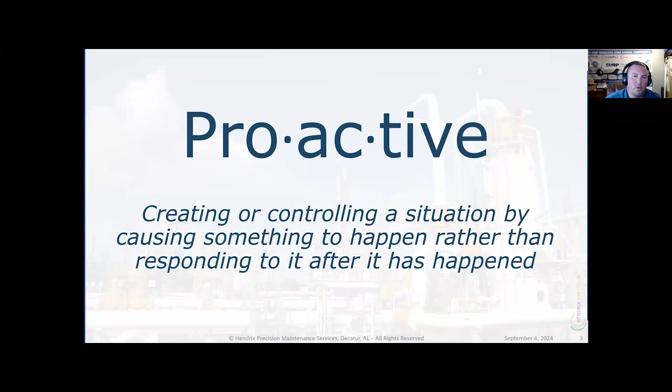So, proactive - what does it mean? One of the most common things I hear, and said myself early on, is when you go to a maintenance and reliability conference, a workshop, or a training, you hear a lot of people say that they want to become more proactive and less reactive. As you go around a room and people introduce themselves and talk about their responsibilities, you'll hear the first person say, 'I'm here because I want to be more proactive, less reactive. I want to do more preventive and predictive maintenance and less emergent maintenance.' Right after they say that, you'll see a lot of heads nodding and hear a lot of agreement throughout the audience. Typically the outcome that comes from that, and where people naturally want to go, is towards more preventive and predictive maintenance.

I want to talk about natural failure patterns and what the data suggests about failures throughout industry - this is industry as a whole, components and assets that have failed across all classes, and the common trends we see in equipment failures. Often what we assume is that the likelihood of an equipment failure increases with age - as something gets older, it gets more likely to fail. This is often at the core of why our maintenance technicians, teams, and reliability teams have their schedules filled with a lot of preventive maintenance work. A lot of times that's a good idea - the most important thing we do in industry is preventive maintenance, taking care of the equipment we have, if it's done right. Unfortunately, there's a lot of preventive maintenance work that is essentially busy work and adds no value.

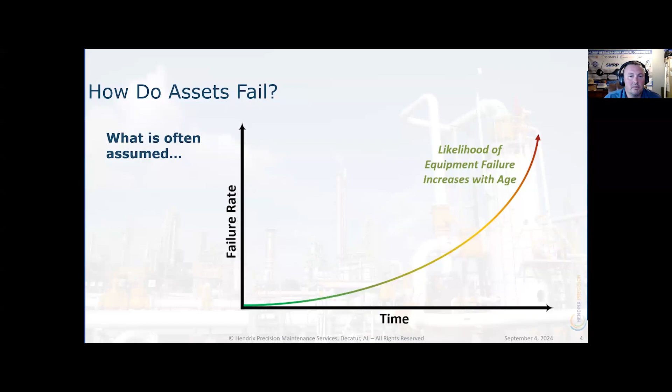Common studies have found anywhere from 30 to 75% in a lot of facilities of the preventive maintenance work that technicians have their day filled with isn't adding any value. That's what we want to get at here. Work that's often done for the sake of an asset, at best, and a lot of times for the sake of a metric, doing the work to satisfy the PM compliance metric so they can pass that up the chain, instead of doing preventive maintenance work, inspections, and work that takes care of the wear components of that asset for the overall success of the business, department, and production.

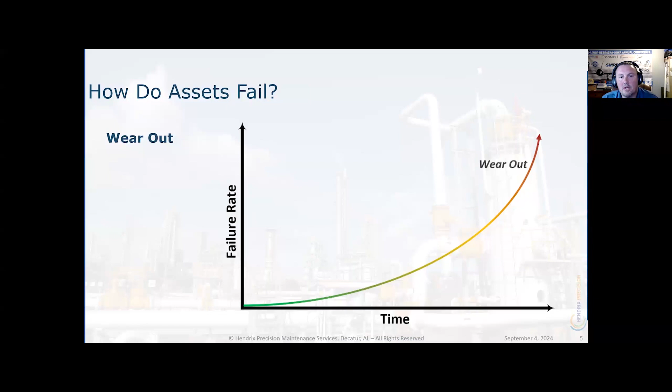This curve that we commonly think of as things wearing out over time is called the wear out failure pattern. Wear out is just as it explains: as things get older, as they have contact and wear components, they fail and degrade. Environmental factors, material selection, just the nature of the thing. Filters clog and can't be washed. Scraper blades wear out and need to be replaced, and things of that nature.

And then we also have random failures. A lot of times you'll hear people saying 'I don't know what happened,' or things like gremlins, 'that's never done that before.' These have no discernible pattern, no repeatable pattern, and nothing tying it to the overall age or number of cycles associated with that asset.

A lot of times when you have failures that are random in nature, the source is poor operational knowledge. Operational overload is very common here, where it's not a consistent overload, but a one-off where it's being run outside of the acceptable band of operation. You'll also see poor design factors contributing, items not being designed for the environment, and poor maintenance practices.

A lot of the random failures, if you have the data to dig in and see what the source of your failures are at your facility, a lot of times these failures will be as a result of, or shortly after, some sort of intrusive maintenance has been done. And what often isn't understood is that the next pattern we'll talk about is infant mortality.

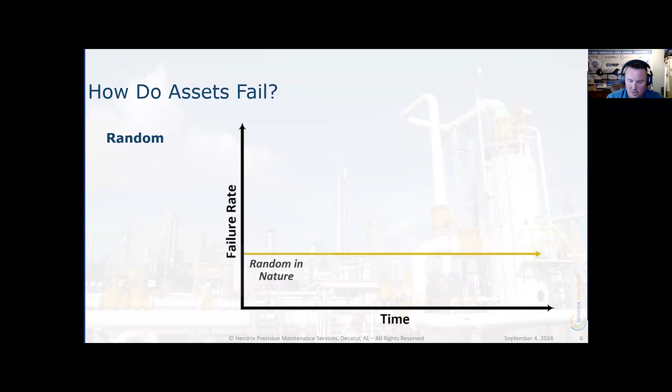When we do intrusive maintenance, tearing down a piece of equipment that's running properly with poor workmanship, we have what's called infant mortality. And anytime we do intrusive maintenance, we reset that clock, or we reset the band.

When we start up and something fails at the onset, a lot of times you'll hear things like bad out of the box with electrical components, with bearings, with mechanical seals. Start it up and it fails shortly after. A lot of the sources of failure with this are similar to the random failure, but it's tied to being fresh from startup or shortly thereafter.

Poor equipment design, poor system installation, manufacturing errors, quality issues do happen. Motors come in, bearings come in that are bad. Mechanical seals, with ISO standards, 9001 standards for quality, those aren't as common as they used to be, but there are a lot of counterfeit parts coming in and things of that nature. So you do need to be aware of this.

But more often than not, situations and failures associated with this curve or failure pattern come from a decision that somebody's made, either in the installation or the operation, incorrect operation, or bad workmanship, just not knowing. A lot of times technicians are doing the best they can with the tools and knowledge that they have.

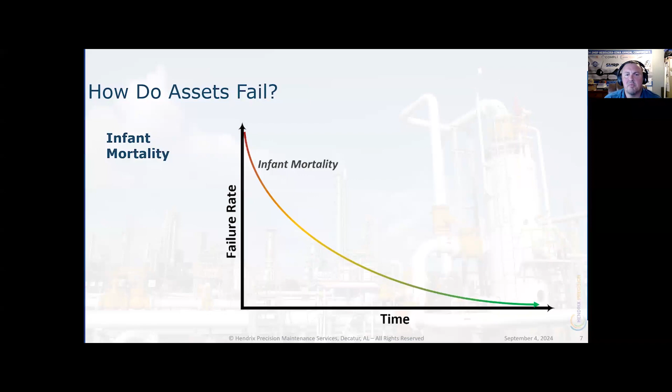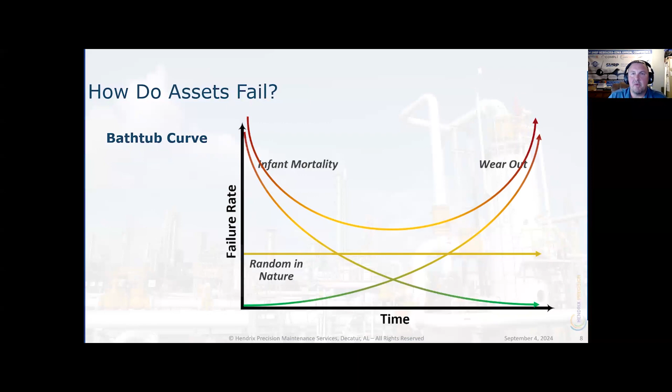So those three curves, three standard patterns: wear out, random, and infant mortality, combine to what's commonly known, and you may have heard it referred to, as the bathtub curve. But those three patterns are the prevailing patterns for how we see failures in industry, in manufacturing. Studies over 35, 40 years, and still what we see today, often when consultants go into a facility and look at CMMS failure data, asset failure data.

Typically what they see when they compare them, they break down those curves and failures in the facility. There's really two categories they break them down into: time or cycle based, which would be those wear outs, where there's evidence linking the failure of that asset to either a cycle count or a general time count. And then you have failures that are random in nature, with no discernible pattern linking it to time or cycle count, no evidence of it being a wear out issue. What they established is that across all of our assets, all of our failures in industry, typically we're looking at between 10 and 20% of those failures being time or wear out based, and 80 to 90% being random in nature, where there's no discernible pattern.

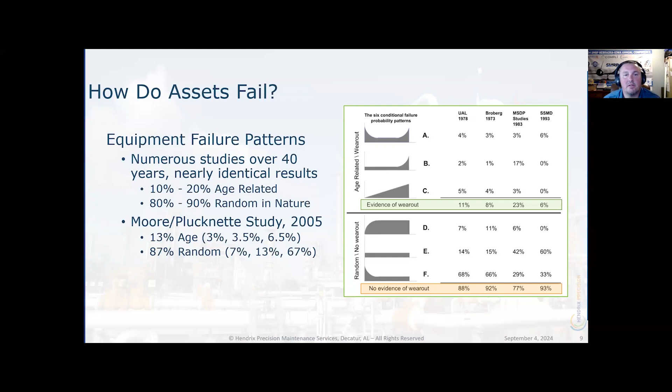And of the random failures, infant mortality is by far the most prevalent. The overwhelming majority of the failures that we see, typically between 60 and 70% of the failures that are random in nature, are infant mortality.

So when we talked at the onset about preventive maintenance, the assumptions we have with equipment failures, failing with age, wearing out with age, preventive maintenance a lot of the time as it's incorporated at our facilities is only suitable and effective with the patterns of these wear out components, and not with the infant mortality.

When it comes to infant mortality, when it comes to these random failures, human error is responsible for the vast majority of these failures. So our goal needs to be addressing these shortcomings. When we do have failures, identifying what the source is. Is it product specifications? Is it design? Is it standards and procedures? Is it workmanship, lack of tools? We need to be looking at those things and addressing them with training and certification of our technicians, and with well-written standards and job plans to make sure that the work they're doing is repeatable and done correctly each time.

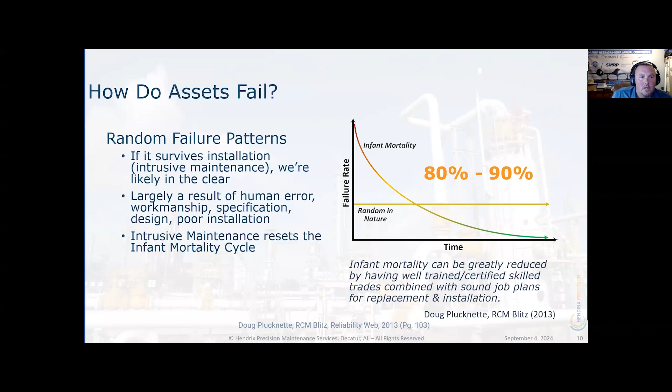So I was in a unique opportunity at the SMRP National Conference last year, and it was at dinner, and we had 7 or 8 people at the dinner table. And just so happened, we had 3 people who had worked for large bearing manufacturers. A lot of what we do at Hendrix is training around the foundational skills when it comes to precision maintenance, rotating equipment assembly. When you think of rotating equipment, the fuses in those systems, anything rotating, typically your failure point is going to be the bearing. When you think of pumps, you're most likely going to be looking at bearings and mechanical seals.

So I had an opportunity while we were at the table to do a very non-scientific study, and asked the 3 guys that were there what they thought, what percentage of the bearings that they put out into the field actually made it to the L10 life.

And the L10 life, for those of you that don't know, is when a piece of equipment is going through acceptance standards and under lab conditions, they put it under ideal operating conditions, and then run it until 10% of the population, of the total tested population, starts to show some level of defect. This is typically what they publish. You'll see a lot of bearings where the L10 life can range anywhere from 10 to 20 years. That would be the point under ideal circumstances that a tenth of that population would start to show failures.

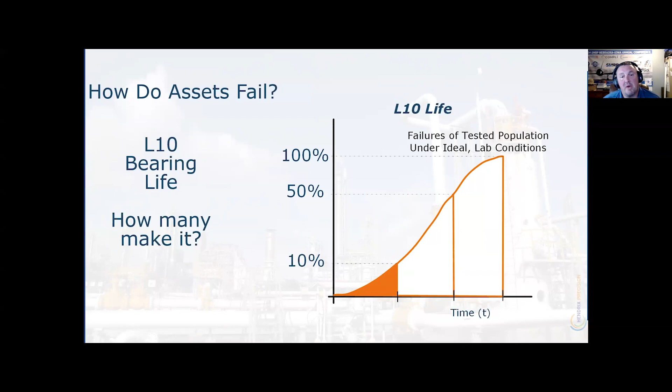Is this bad statistical analysis? Or is it bad bearings? What do you think? When you start looking at everything that has to go right for a piece of rotating equipment, for one of these components to have a long life, there's a lot of things that have to be in play - from manufacturing, shipping, receiving, selection. When you think about your team at the facility, are they selecting the right components? When it comes to your maintenance technicians or even your supply shop, a lot of times we send rebuilds out to a rebuild shop, and we assume that they're the best person for the job.

We assume that they're trained, that they're certified, that they're going to do it with precision and do it the right way. How often do we have an asset come back from one of those shops, put it into service, and it fails shortly thereafter? Or if we do acceptance testing, it fails before we get to put it into production.

And then you have lubrication. We kill more assets with a grease gun than anything. Over lubrication, under lubrication, incorrect lubrication, not using calibrated grease guns, contamination, etc.

And then operation. How many times do you get out into the field, ask an operator, if a piece of equipment isn't running, you ask them how it's supposed to be running. You ask them what their control standards are for it. Ask them what their settings are. You'll find that a lot of times they don't know. They've been given a production target, might be overclocking a piece of equipment, might be overloading a piece of equipment, etc.

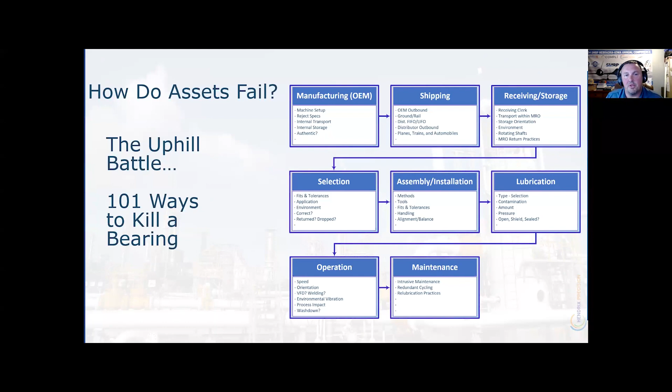It's the old adage or orientation practice of following Joe around. You come into a site, you follow somebody around for a couple weeks, and then you get put on shift, and you're expected to know everything without having the right training, without having standards and procedures in place that you can follow to baseline your work against.

So this is the specified design, install, potential failure, and failure curve, the SDIPF curve. This has gone through several revisions over the last few years. And when we talk about failure management versus failure avoidance, when we talk about moving from being reactive and always working in emergent work to being more proactive, a lot of times we talk about doing more preventive and more predictive maintenance.

And ultimately that is a failure management practice. We're trying to catch a failure that's already been introduced into the system. There's already some defect in the system that's going to cause that piece of equipment to fail. And we're trying to catch it and replace the component or the asset while it potentially still has some useful life on it before it fails catastrophically and causes us downtime.

When I talk about failure avoidance, what we're trying to do is keep the defects out of the system. We're looking to extend the I to P interval. The I to P interval is what's considered profitable operation of the equipment. That's from the point it's installed and commissioned and released to the point that potential failure shows up. And that's what precision maintenance tries to do. We're trying to extend that I to P interval, the productive, profitable operation of that piece of equipment.

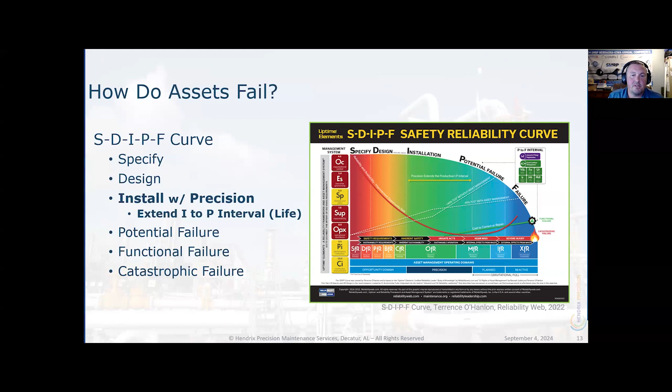So what we know about failures is the overwhelming majority of failures that we see in manufacturing, they aren't wear out, it's not degradation. A lot of times it's a decision that we've made somewhere along the lines. We're killing the asset. If we want to be truly proactive when it comes to maintenance and reliability, which is why we have reliability departments, it's why we have predictive maintenance departments, we want to move as far back on the S-D-I-P-F curve as possible.

We want to make sure that we're extending that during the installation phase. We want to make sure that we have acceptance standards. And then when we do fail, we want to make sure we're failing forward.

There's way too much parts changing in industry, even when we're doing preventive maintenance and predictive maintenance, condition monitoring. We throw parts at an asset without understanding what's causing that problem. If we have high vibration, we replace the component and start it back up, and oftentimes we'll see that same high vibration 3 months, 6 months down the line. Whereas if we installed it with precision, evaluated our acceptance standards, and put it in to limit that vibration, we'd be a lot better off. We're keeping those defects out of the system.

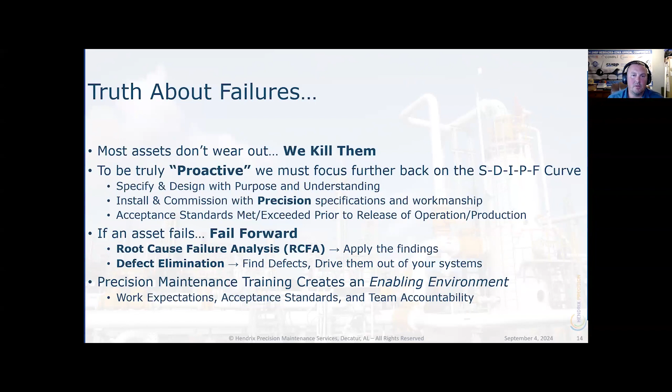So what we do, precision maintenance, the precision maintenance certificate program. I started working with Kirkwood just before COVID with this program, working with the Kirkwood Industrial Maintenance Technology program with some internships. I had been denied approval to have this training for my team here locally, and was trying to find another way. And I knew that our technicians in this area needed this training.

There was a big push, and you still hear it all the time, Industry 4.0, AI, advanced predictive maintenance technologies, etc. And it felt to me like we were ignoring a lot of the basics, the basic fundamentals of what we do as maintenance and reliability technicians. And what I wanted to do was address a lot of those overlooked, taken-for-granted fundamental skills.

I wanted to get our technicians set up. Our saying at Hendrix is do it once and do it right. We were addressing a lot of the same failures over and over, the thorn-in-the-side issues, as I like to call them, and I wanted to start eliminating those things.

And I had a hunch that a lot of them were due to either precision installation or our lubrication practices and lack of a sound lubrication program. I wanted to set our technicians up to solve those problems on their own. I wanted to expose them to the right way of doing things and have them start to challenge some accepted assumptions that we had within our facilities.

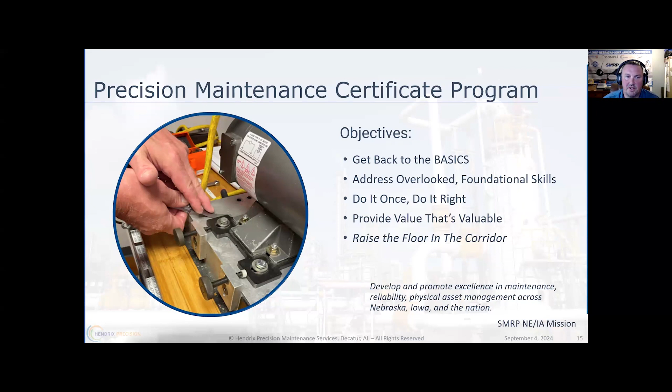I'm not giving this presentation because I work for Hendrix Precision. I work for Hendrix because I feel very passionately about this. I think a lot of the skills our technicians need, especially on the mechanical side of the house, have been taken for granted for a long time. It's not just turning wrenches, just fastening bolts. There's a lot more to it than that, and I wanted to promote that and set as many people up with these foundational skills as possible. So that's ultimately why I joined Hendrix.

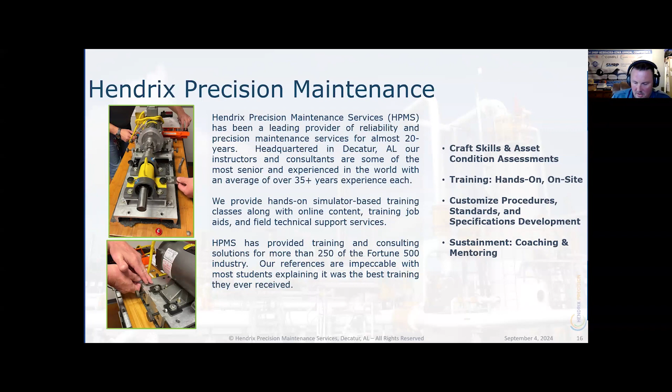At Hendrix, we do craft skills assessments and training, procedure development, and field coaching and mentoring. The foundation for the program came out of the space industry.

In the late 60s, early 70s, there were a couple things happening in parallel. We were trying to beat the Russians to the moon, and continually had a real tough time getting a rocket into space. At the same time, engineers established that a lot of the failures were due to rotating equipment, seals and bearings, which is what we see commonly in industrial manufacturing. As they were able to fix the problems, the big thing that came out of that is they reduced vibration by 20%.

They were able to double the life of that asset, exponentially increasing the life. About that same time, Ralph Buscarello, whose son Greg works for us, was in the early stages of vibration analysis for industry. He worked a lot in the paper manufacturing industry, and he wasn't studying vibration analysis for the sake of selling logging equipment and doing the analysis. He was trying to drive defects out of the system. So as he studied vibration analysis of rotating equipment, he was also trying to dig into the root cause - what was causing that vibration, and how could we establish training to drive those defects out of the system?

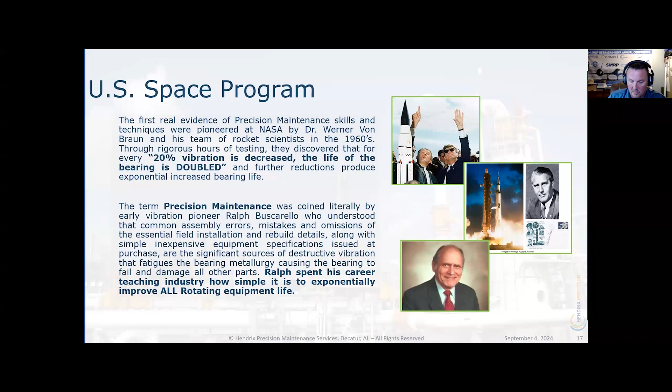Ultimately, Ralph's class led to what we now see as Hendrix Precision Maintenance Training. He was kind of the forefather of that, working it into the pulp and paper industry. Now the company that Phil Hendrix started was a result of that.

Some of the core things that came out of that program: reduce vibration by 20%, double the life of a piece of rotating equipment. The correction objectives were to eliminate common assembly errors, key lengths, key orientation, things of that nature, soft foot, and establish tighter balance specifications from your manufacturers, from your OEMs - what's the balance that we expect to come into our facility?

And then what do we do as technicians, as commissioning technicians, installation technicians, to not disrupt those balance standards? We wanted tighter alignment specifications. Do we just straight edge it? Do we bolt it up? Is our metric for success whether it's pumping, turning, conveying, and as soon as it does, we walk away? Or do we establish tighter alignment specifications that'll ensure a long life for that asset?

We also wanted to eliminate lubrication errors. Those are the four core things we cover in our Precision Skills 1 class, and the things I really want to address with this program for our technicians in this area.

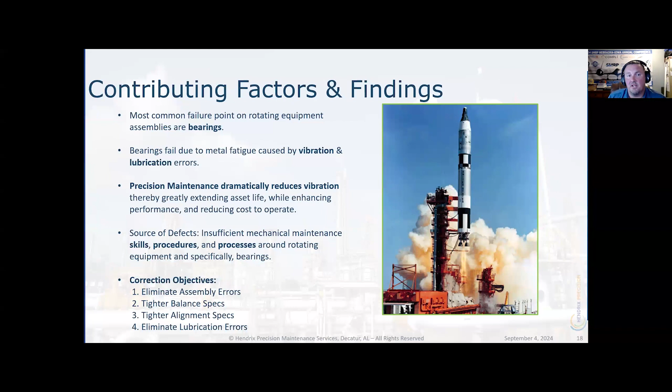You'll see here the reduction from that study. As you're able to reduce vibration by 20%, you double the life of the bearing.

And the format that our class takes is on day 1, we introduce several errors, bugs, into a piece of rotating equipment. And then throughout the week, we teach a subject, and then the technicians or attendees go back to the simulator and they remove that bug from the system. And then they're able to monitor amp draw, temperature, and vibration of that piece of equipment.

So we tell them a thing, and then we show them how to do that thing, and then we show them how to measure and then correlate that to extended asset life in that piece of equipment out in the field. And that's the thing that really hits home with a lot of technicians. We aren't just presenting to them for 4 days.

We're covering the why, and then really digging into the hands-on aspect of it. A lot of the technicians are kinesthetic learners. They need to do something to learn. If you put them in front of a PowerPoint presentation for 4 days, they're going to sleep through it, and very little of it's going to go back with them to the field.

If we show them how to do it and then make them do it on their own, so we simulate an equipment outage for the 3rd day, where we strip it down to the base, and then they go through with their team and do it all on their own. There's a lot of learning take up that happens with that, and a lot of that makes it back out into the field and back out into your plant.

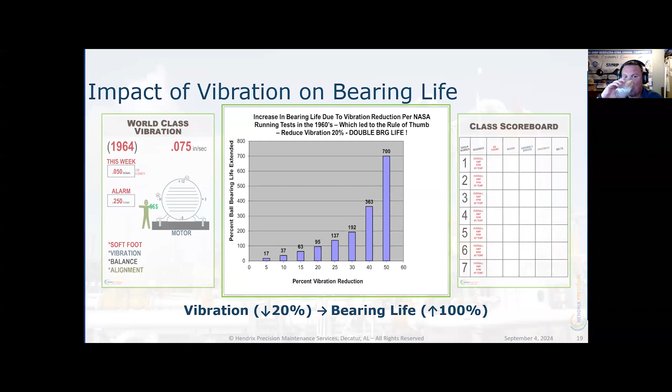So I've always thought of continuous improvement as kind of a real growth and real improvement. It doesn't happen overnight. It's a marathon, and that marathon we're running is on a treadmill. So we're going to continue to raise that bar for what's acceptable.

But what we need to do to start getting better in our facilities is to establish a core set of principles that guide what we do and work to get just a little bit better each day. Find those opportunities to eliminate inefficiencies, identify absence of value in the work practices that we're doing, the things our technicians are doing on a daily basis, and start chipping away. Stop throwing parts at symptoms, like I said with vibration analysis, and dig in and address the underlying problem and root cause.

Eliminate defects. Too often, when we have an improvement initiative, we take on too big of a chunk. What we need to do, and what we aim to do coming out of this training, is identify the wolf that's eating the sheep and take care of it. We want to find a problem, that thorn in your side. Find one pump, one conveyor, one auger, one fan that's causing you a lot of problems, and go fix that, and then move on to the next one. Chip away a little bit better, a little bit each day.

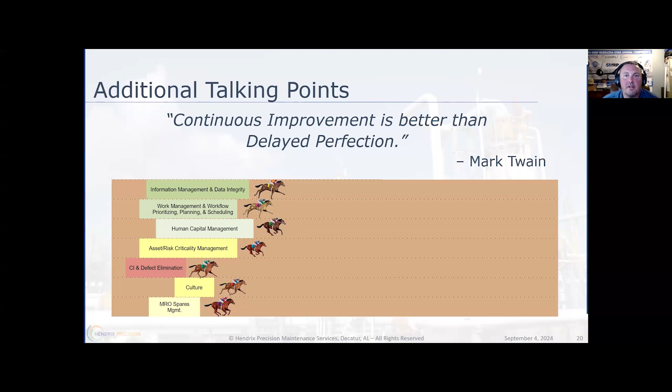And to be truly proactive, we need to build a team that asks the right questions and challenges the wrong assumptions. And I think if we can do that, throughout this region, we're going to really set ourselves up for a lot of success in this area in manufacturing. So that's all I have.

I appreciate your time. Feel free to reach out to me anytime. I'd love to talk about any of these items in greater detail. Yeah, thank you very much for your time.